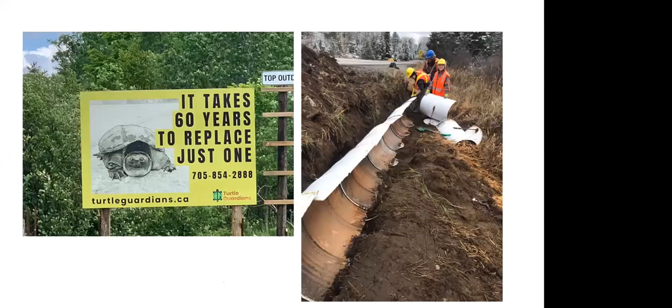Carrie will touch on those as well. And we have been piloting awareness projects too, such as these billboards.

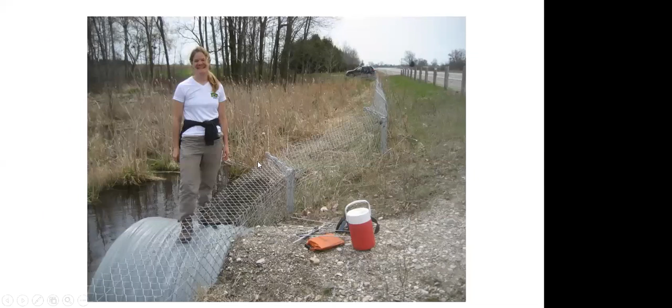So I would like to introduce Kari Gunson. Carrie started Eco-Kare International in response to the growing need to mitigate road impacts on Ontario's reptiles and larger mammals. Although originally from Ontario, she began working in the field of road ecology in Banff National Park, Alberta, from about 1999 to 2005. Banff now has 6 wildlife overpasses and 38 large animal underpasses, and these structures are being implemented on provincial roads in both British Columbia and Alberta.

Carrie started working with amphibians in Banff, then moved to upstate New York, where she became acquainted with amphibians and reptiles in Eastern North America. Carrie specializes in designing, installing, maintaining, and monitoring wildlife mitigation systems in Ontario and elsewhere. She has installed over 10 kilometers of exclusion fence for reptiles and has participated in many grassroots projects.

She is here today to share with us some of her most formative experiences in road ecology from the last 10 years of monitoring work conducted along Highway 69 from Port Severn to Sudbury. Today's presentation will focus on hands-on maintenance and adaptive management needs along Highway 69, but she's going to focus on how-tos, do's and don'ts, and best management practices for designing, implementing, and maintaining infrastructure to mitigate threats to turtles on roads.

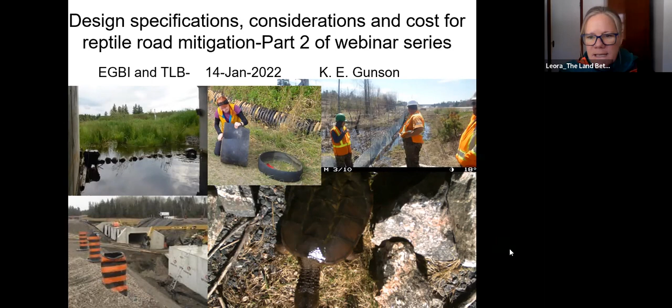So this entire project, all these series of workshops and webinars and the field day we had, is being funded by the Eastern Georgian Bay Initiative. We will start with talking about roads and reptiles for about 10 minutes. It's already 1:15, so we will be a little behind on these times throughout the presentation, and we may go over the 3 o'clock mark, so if you have to leave, you have to leave. As I said, it will be recorded, so you can come back later. There's a lot to cover. We're trying to brush through all the aspects of a road mitigation strategy for turtles and reptiles in general, but really there could be a 2-hour workshop on each one of these components.

As a background, Canada has 8 species of freshwater turtles, and all of them are at risk. If you look up the threat documents, in the COSEWIC and COSSARO documents, you will see that road mortality is listed as a threat for 7 of these 8 species. Why only 7 of the 8? The 8th one simply doesn't come out of water as much as the other 7 species do to come up and nest.

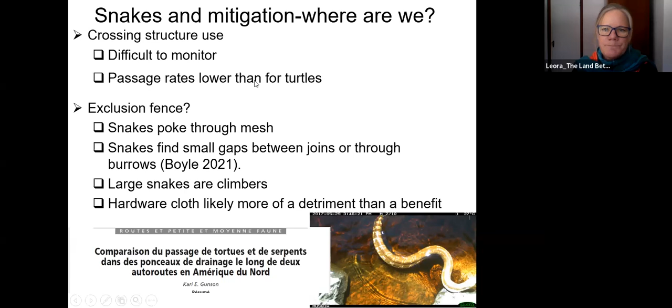Okay, so I'm going to go to my next screen here. This shows some examples with snakes. They can find those small gaps and get through. They can find the small holes and get through, and sometimes they can't get back out. And that's a problem, because then they will perish in the fence.

So some ideas of what we can do: we can securely make sure our joins have no gaps. We have to pay attention to that detail, especially for snakes. And then we can do really intense joins at elevation, with vertical profile gains within the terrain, to make sure those gaps will not occur.

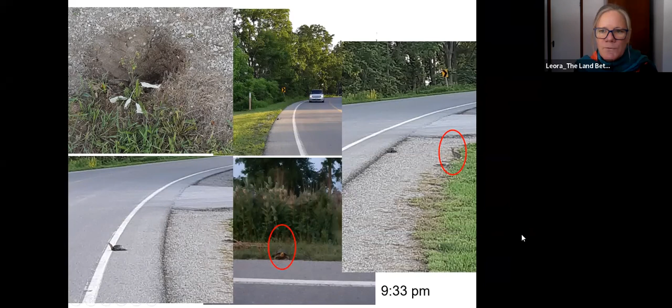So this is the biggest problem here, crossing back and forth while nesting, and they don't move fast when they're doing this. This is an example in Long Point on Front Road where we're having a lot of turtles coming up, we believe, up the steep terrain.

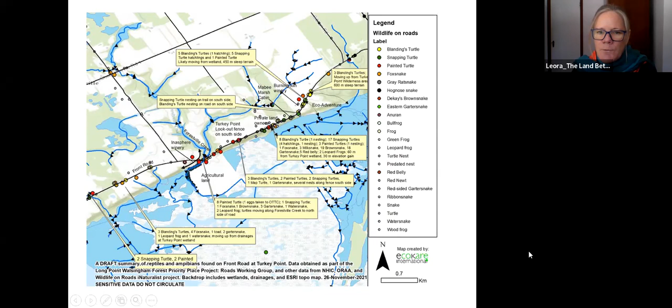Some could be coming from the inland wetlands. We believe some are climbing all the way up the steep terrain from Lake Erie marshland, and then their hatchlings have to somehow get back to where they're supposed to be. So this is a huge problem as well. This is what it looks like, and we're hoping to install some mitigation there.

What we do think will work well is having turtle guardian patrols helping these turtles cross in these areas. The traffic volumes are not significant, so we believe we would be able to do something like that.

So just in summary, I like to compare. I've worked with large animals in Banff, that's where I started, and now I'm with reptiles, primarily in Ontario. I like to compare lessons learned from large animals, because we've done so much more there for a longer period of time than we have for reptiles. I think we can take those lessons learned and apply them, and I will indicate that throughout this presentation.

So with larger animals, exclusion fence is working quite better. You see statistics of up to 80% roadkill reductions. This is because this fence is easier to build than the smaller animal fences, and I'll tell you why as we go through.

But the smaller animal fences need to have no holes in them. So this is one of the main issues here. We can have mesh holes, but there is an apron at the bottom, and I'll talk about that later. Also, the spacing between structures has to be smaller, more structures for reptiles because they move more. So this means we need an integrated strategy of designated plus drainage structures to compensate for that spacing we need.

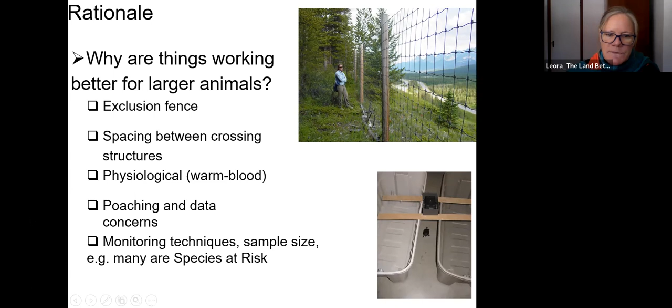And then of course, monitoring techniques for reptiles is more difficult because they're cold-blooded and we can't use motion-triggered cameras. This is us testing whether a motion camera that we use for large animals would work with reptiles, and it only picks it up on some occasions, not all. So we have to make amendments and modifications for that.

We went through monitoring actually in the last technical series, so you can look that up there if you would like. So there's two kinds of strategies, so to speak, with road ecology and road mitigation.

Strategy type 1 is using citizen science, behavior, or changing motorist behavior. It's working with humans to try and help these animals. One example is lifting them up with our hands, when it's safe to do so, to help them cross the road, and to put up signage and hope that people will pay attention to that sign and perhaps look for turtles at that location, or perhaps when driving elsewhere. These signs work better with public awareness campaigns.

And Liara has already shown you her sign. This is on Monk Road. I think this is a good idea, and we need more of these, bigger and in your face, the better.

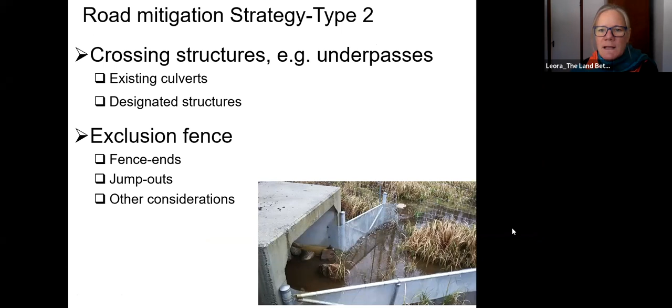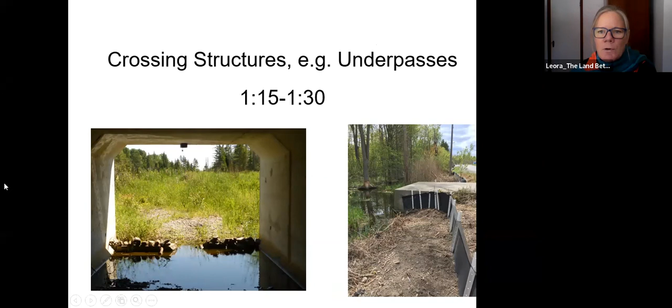So the way we set it up is we have considerations, and we're going to try to group the considerations into the same theme. So this first slide shows the first umbrella way of thinking about what you're doing when you're designing and implementing crossing structures for reptiles on roads to provide connectivity.

You want to know, is it a retrofit? If it's a retrofit, that means it's an existing structure and you're trying to make that structure work for reptiles. Or is it a road improvement maintenance project? That's important, because if it is, you can earmark those, know about them, talk to the transportation agency, and have them perhaps upsize your culvert if it's a culvert replacement project, or help integrate the cost of including specific features in the crossing structure that you need, like exclusion fencing for example. You could get the cost integrated into that process.

A new road, obviously, is a pretty good scenario, because you can implement designated structures as well as upsize your drainage structures for reptile crossing.

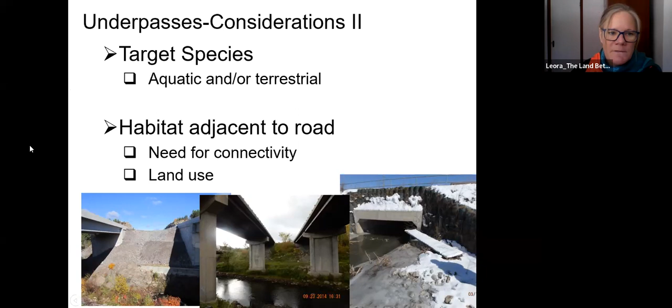And so that shows at the bottom right here, where you would want to put a ramp going in for terrestrial passage. And perhaps you would promote or facilitate smaller mammal use in that scenario, and perhaps even some turtles would go through there. Then you want to look at habitat adjacent to the road, and essentially you want to look at whether or not you need these crossing structures for these animals. In some cases, you might not want them to cross the road, and I'm going to show an example of that. This is an example of a project I worked on in about 2015 with Morrison Hershfield on Highway 17.

It was being upgraded. The road was being widened, and there was a crossing structure here for hydrology, and we were wondering whether or not we wanted turtles to use that crossing structure, because you can see that it's a pristine habitat on one side, and it's a community which goes into more agricultural landscape on the other side. So in that case, we might close that crossing structure off. And we think they were nesting along this road. So they were coming here to nest, and that's why they were being road killed. So we would put nesting mounds here and actually close the crossing structure off.

We don't necessarily want connectivity there, as long as we feel that they have their habitat on the north side of the highway. And this is an example of maybe you don't want connectivity, looking at it as site specific here, because you're putting the turtles or the animals right into a community where there's dogs and people. So we have to think about that. That's important, the land use and what's happening around the situation.

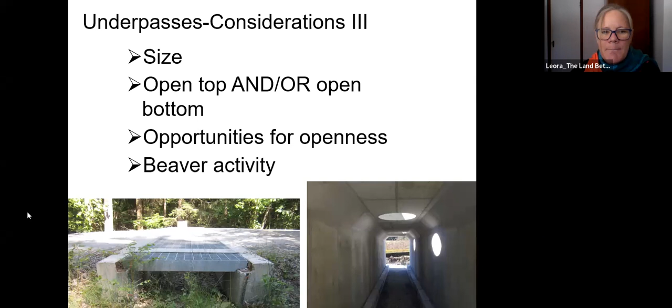The third consideration is the design of the structure, the size, whether you want open bottom, open top, opportunities for openness, always looking for opportunities. So some clever ideas that have come up are using grates for the open top, and manholes which shine the light through, and open medians is another example. So this is an example of open top ACO tunnel, and this is an example of the footing in the Bruce Peninsula of a custom-made crossing structure where they put a grate on top. It's an example of open median.

Now, if you're going to have an open median, it creates more openness, because now the structure is shorter, so there's more light coming in from both sides of the entrances and exit. And also you need to think about closing the median so that when they cross through, they won't go onto the road from there. And this is an example of Mexico where they actually have concrete closed medians. I don't think it was for wildlife, but it works well for wildlife. It's a very good example.

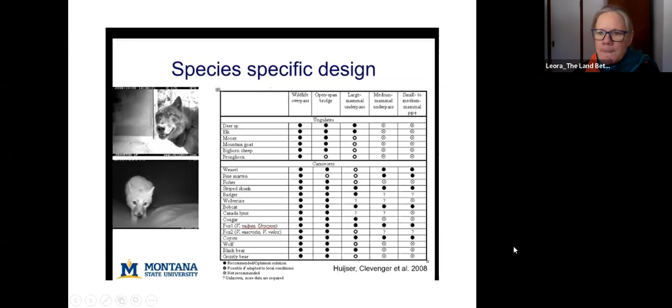So the beaver activity is becoming more and more of an issue with road ecology and turtles simply because beavers and turtles share the same habitat. So we have maintenance putting grates up on the crossing structures because they don't want beavers damming inside that structure. And in doing so, and I'm sure that fish biologists have been grappling with this problem for a long time, we have just closed off any connectivity and permeability through that structure for turtles. So we're trying to come up with some solutions that will allow the beavers to keep their ponds, turtle habitat, and keep these grates open and not have beavers dam inside.

And one way is by constructing trapezoidal fences around there, but actually creating a gap between the exclusion fence and the trapezoidal fence so that turtles following the fence come up and they can get through that gap, but beavers can't with their sticks. And beavers tend to not move upland. So you need to make room between the exclusion fencing and that trapezoidal fence to integrate that kind of concept.

This is an example in New York, where Angie Ross sent these pictures, where they've built the exclusion fencing, but now we don't have the connectivity. So we need to figure that out through these grates.

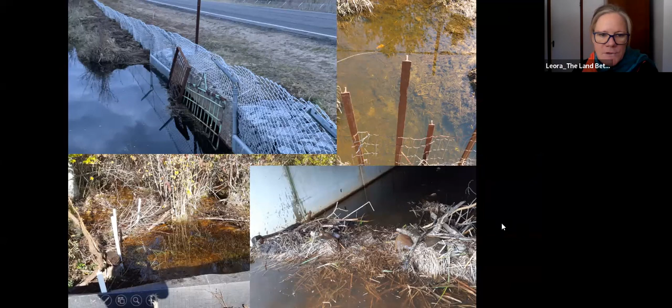So consideration number 4 is the spacing of these structures. We need to consider having as many structures as possible. The more the better, up to 100 meters for toads. And from Europe, researchers are saying 50 meters apart. For some salamanders in Europe, 50 meters apart. They don't move far. For turtles, we're looking at 100, 200 meters apart.

To do this, we need to integrate drainage structures with designated structures. I've come to so many projects where I found the drainage structures could have been integrated into the whole strategy, and they weren't. And it's not the size that's the problem. I'll show some examples, but it's just the detail that we could use those structures. Either there's too much water in them, or there's too much riprap put around them, things like that. And we need to think about that.

Now, everything can be a passage for turtles, even if it's too small. If it's not that 1 meter, we still don't know if a turtle's there, or maybe some don't want to use it, but if they have no choice, they will use it. So you've got to think like that. Alignment in the road profile is so important, and I'll tell you why, and I'll show you some examples of that.

So this is an example of not integrating drainage structures in a road that had spent a lot of money. This is Stony Swamp in Ottawa, which spent a lot of money on designated box crossing structures, which I'll show you a picture of. And then right next door, there'd be this drainage, but there's a grate on it. And the grate would have a bunch of debris in front of it. Nothing can get through. So there is opportunity for passage here. So I cleared all that debris. But people need to think about that, and we need to.

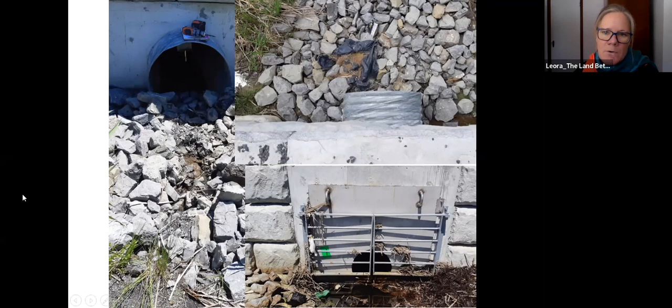This is an example of a drainage structure that we need for turtles, and it was filled with riprap at the entrance. A simple detail, an oversight, and so they came back and they put in smaller gravel between the riprap so that the turtles and other animals could more easily walk. I've seen riprap used in designated structures where they were put in wetlands, and I've seen it all over the world. So this happens everywhere, and it's a simple thing because we're used to just putting riprap at our drainage structures, and so we have to just think outside of the box.

Hydrology is so important. I've heard people within agencies say that if they're fully submerged, turtles won't use them. That's not true. We've monitored this culvert when it's almost full to the top, and we have turtles going through there. It is nice to have perhaps 50 to 75% water flow or water submergence, because then there's more light, and also they can come up for air if they need it. It doesn't mean that they won't use them if they are full, but we do want to maybe look at 50 to 75% water flow.

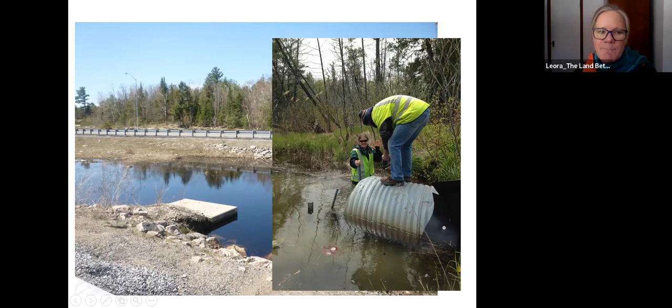And we don't want massive water flow going through either, because that could force them to go in and they can't turn around and get out, and things like that.

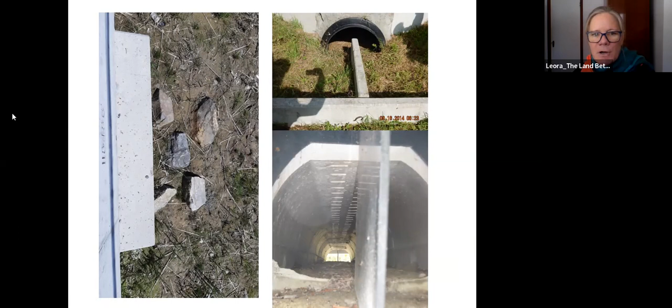So we can impede water flow simply by putting blocks in front of the structure, inside the structure, things like that. We also want to consider when an animal's moving along for hundreds of meters along a fence, looking for a way through, to maybe stop them, slow them down when they finally get there so that they will use it. And that's what these outward extensions are exactly for. And it's quite important to think about that, not necessarily to block the entrance, maybe pull it out a little bit, but I've read in so many papers where the frogs have just walked right by.

Perched culverts, you see it all the time, and not just for hydrology, but you see it for designated crossing structures. There's scouring when the water comes through. This is an example of our field day on the right. And we built a turtle ladder or snake ladder or hopefully wildlife ladder for the animals to climb up that perched culvert. And that's how simple it can be. Just grab a pile of rocks and build that ladder.

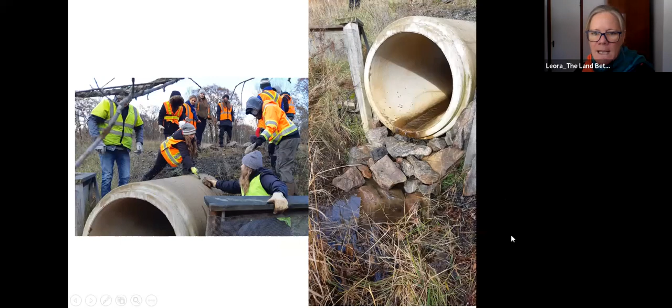Here is a perched culvert. They had put fill, hard mud, inside the culvert, so we took it out at the front here and we used it to build up a ramp so they could get in, because it was about, I don't know, 6 inches off a ledge for the animals to climb in.

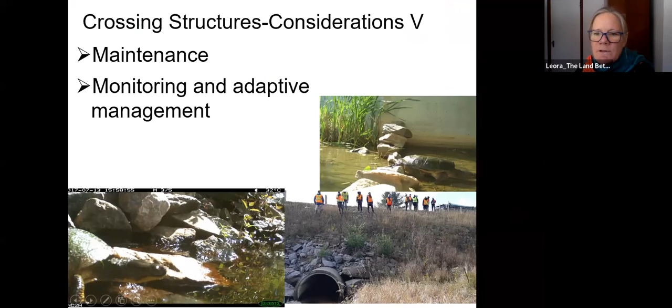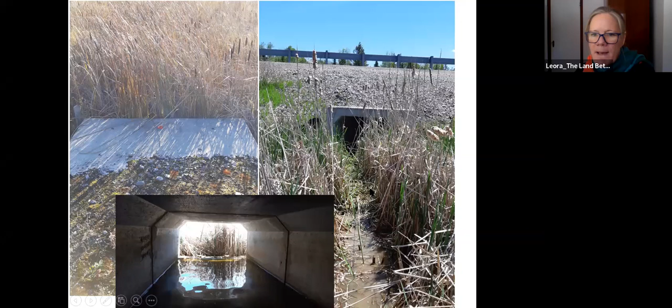Maintenance and monitoring and adaptive management, we went through that in the last workshop, but we have to definitely consider this when we're building these structures, and definitely monitoring so we can do adaptive management. These are examples from Noble Road. We have a crossing structure with a mass amount of vegetation, Highway 69. This is a crossing structure for reptiles. We cleared that with a weed whipper and we made a path for turtles. It's important to do each season.

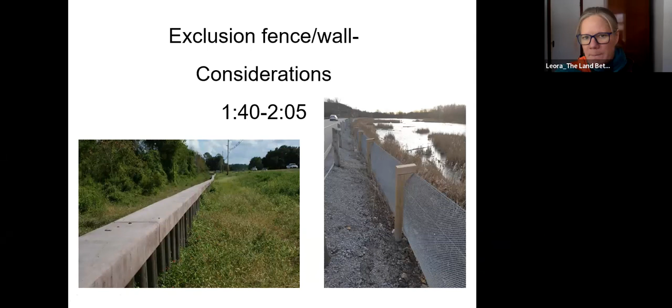Okay, so you can still see my screen, right? You can see my screen okay? Okay, we're going to go into exclusion fence and wall. Walls are important to consider, definitely. This is about barriers, about keeping turtles off the road and preventing roadkill, and funneling them to crossing structures. Hopefully going to spend 25 minutes on this section. It's a doozy, that's for sure.

So we've already gone over these types of considerations from an exclusion fence perspective. If it's a retrofit, we need to go out and select a site conducive to installing exclusion fence, and there have to be crossing structures. Or maybe we want to just put exclusion fencing on one side of the road because there is trouble on the other side that we don't want them to get at. That's possible as well. Road improvement and maintenance projects are helpful because they can integrate some of the cost into the project, but also can help structure the road widening project or culvert replacement project. You have the machines out there, so they could help prepare the landscape for installation.

New roads, obviously, give you the opportunity to work with the landscape a little bit more along the linear route, to perhaps install guide rails that you can attach the fence to, or use existing structures, or build in those existing structures. Possibly there could be a large animal fence going up, so obviously an excellent opportunity to integrate mitigation for smaller animals, and I'll talk about that.

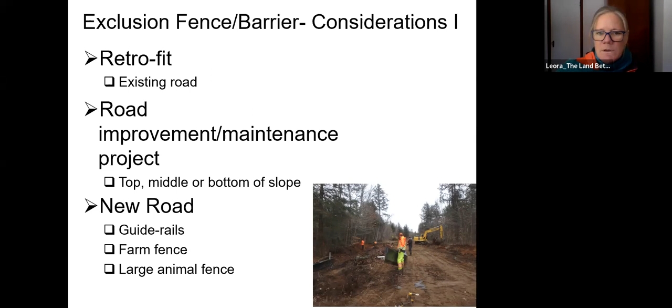So consideration number 2 is looking more at the placement of the exclusion fence, whether or not the wall can be continuous along the road transportation route. The main reason this does not happen is because we lose connectivity from access roads and driveways, so we have to take that into account. If there's a lot of driveways, you may not even want to consider exclusion fencing. However, there are some solutions for that, and I will look at them. For large animals, we use Texas gates, and there's that kind of concept as well for reptiles.

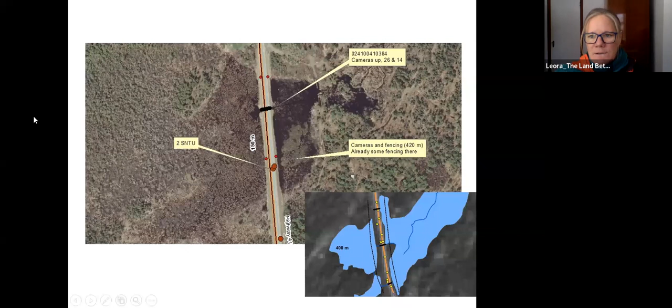This is on Highway 6 in the Bruce. If we put in a tunnel underneath there, attaching to the exclusion fencing on both sides, the fencing can go up the access road a little bit. On the right you can see it extended a little out, but I would have put that a bit more away from the road to keep the animals moving straight through. It's all continuous and open grade, so they probably feel comfortable going in there instead of going up and over onto the road. I believe this concept was installed on Highway 6 but I haven't been out there to see it. If anybody has pictures, please send them.

And quickly, for those new to turtle conservation and behavior, can you talk about how turtles navigate, how much they can climb, and why they need to cross the road? We're going to go into that a little more later. For everyone attending, those are the facts if you're not familiar with turtle biology: there are reasons turtles have to cross the road. Turtles are exceptionally good climbers, and they navigate the landscape uniquely. Carrie will touch on those. Designing these with a biologist at your side who understands these things is really important.

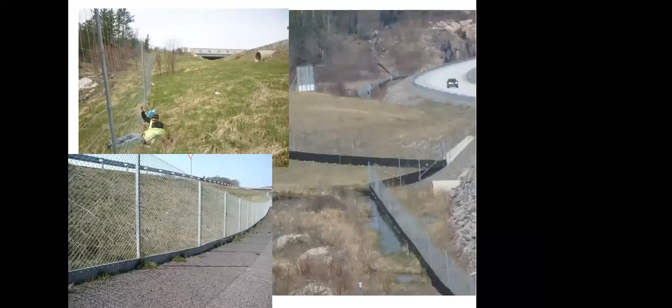This is a consideration for the exclusion fence. I talked about attaching it to a larger animal fence. This example top left had no reptile fence attached, and had they added reptile fence it could have done dual purpose, acting as the apron you often see with large animal fence. An apron is a buried piece of chain link to keep animals from going under, as you can see animals do go under. Bottom left is an example from Germany with Hans, where they have a concrete footing panel with drainage holes, which would work for reptiles if it was just a little higher. Rule of thumb is typically 60 centimeters above ground, and a top lip adds additional security since reptiles have been seen climbing exclusion fencing.

Farm fences are excellent examples to attach reptile fencing to, and maybe you have to build it, but sometimes it's already there. In Mexico, along the right of way of every highway there is this farm-type fence with concrete posts embedded in the ground, probably there for a long time. I'm trying to get them to use these existing structures for exclusion fencing instead of building a whole new one.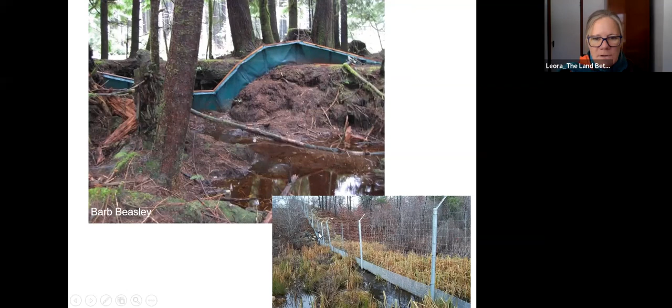Bottom right, you're looking at wetlands. Are you able to bury fencing in those wetlands? What are you going to do to get it secured there? Those are things to consider, it can get quite expensive, and that's also Canadian Shield rock. So that's terrain, consideration number three, which I already touched on. If you have steep slopes, you have to consider where you're going to place the fence along that slope.

Safety constraints are different for every jurisdiction, but they continually talk about the clear zone. The MTO especially talks about the clear zone. You can't have metal objects in the clear zone, so that counts out T-posts.

You need to know about that because then you're not going to use T-posts in your exclusion fence. So you need to know about that in the designing phase for your exclusion fence design.

Drainage constraints are obviously a big issue on roads. We've been trying to work with drainage, with more storm events on roads that have been occurring.

So there are going to be washouts, and that's always going to happen, regardless if you use mesh or solid fencing. It might happen more with one than the other, we're not exactly sure, but it happens with mesh.

This is mesh right here. A simple fix is to put riprap in the areas where you think those washouts are going to happen, where the terrain dips down and things like that, when you're implementing your fence.

Another consideration, not so much in Ontario, is that barrier walls are a consideration for exclusion. In that case, you could put pipes underneath, which might not be as expensive an option as installing sewer systems or something like that.

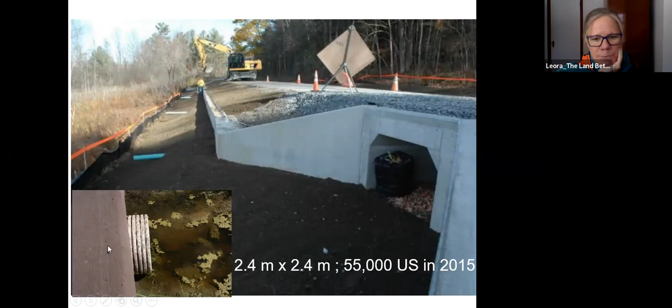This is an example of pipes going underneath, and this is a drainage pipe. You could put mesh on there so animals don't get through, and close that off for that kind of issue.

And here's an example of a solid barrier being transformed into a solid drainage, having drainage capacity with Animex.

They're hoping to get this into the mainstream market with their perforated panels, where it will be buried into the ground.

So, exclusion fence considerations number four are the target species. As Lior brought up, we might be blocking turtles' habitat needs with this exclusion fencing. That's why the crossing structures are important.

But at the same time, they could have been nesting on that side of the road where you just put the exclusion fencing. So maybe you want to position your exclusion fencing so they still have access to the nesting habitat on the roadside.

And if they don't, then you might want to supplement that with a nesting turtle beach.

We won't go into that too much, but it is important, and we need more design there and innovation, because we are having problems with poaching. Again, another complication with turtles.

If there's going to be poaching, and poachers know that the turtles are there along the roadside, they may go up and down the exclusion fence looking for these turtles.

So how do we make that work? Opportunities to put these nesting beaches a little further away from the road would make sense. And we need southwest exposure, so we need to know that there's not going to be forest and trees around that nesting mound.

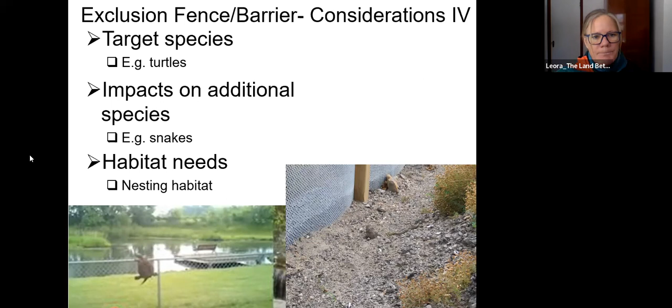And this is examples of the nesting beaches. This is where we know that the turtles are nesting. We've put exclusion fencing in, we've cut them off from their nesting habitat.

This is an example in the Bruce where they put a nesting beach. This is Presqu'île, where they built their nesting beach almost exactly like the road shoulder, and it's compact, and they've shown pretty good success.

But they have to protect those nests because they have high raccoon levels, because there's a lot of people and camping and things like that here.

So it has to be an integrated strategy, not just put the nesting in and then leave. And this is an example of a brick sand nesting mound inside the exclusion fence in Simcoe County.

Budget is obviously going to be a big one. We'll talk about cost, who's paying and how you're going to get the money. We're going to talk about a few specific examples.

Longevity, the desired lifespan - best to go permanent in the beginning. Then you don't have to do it again and go through the whole process again. Do it right, make them permanent and long lasting.

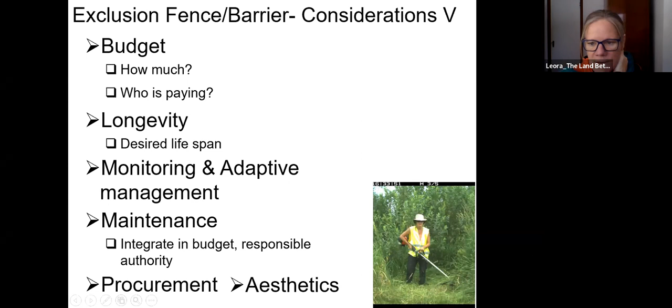Monitoring and adaptive management, we talked about that before. Maintenance - who's responsible? This is a problem all over the world, not just here. It's more important because one small hole, the turtles will find. It's amazing that they are so tenacious, maybe it's because they just really don't want to use those crossing structures. So we've got to make those crossing structures work for them, and make sure we don't provide them opportunities to evade the systems we're building, spending lots of money for.

Exclusion fence considerations, not just the fence itself. A fence end is so important. If you can't span as much habitat as you want, go 100 meters beyond and 100 meters beyond - if you have a good fence end and find those opportunities, you can save that fence end effect from happening, which is a huge problem with large animals and reptiles. Jump outs are something we've redesigned with large animals, keeping innovative with the heights and different details. I'm going to go through that with reptiles.

Fence ends - we can either do nothing, shown on the right, not recommended. If you're going to do nothing, at least make sure you span all of the habitat and then some. Tie into existing or engineered structures, find those structures. At the other end of this fence, there's actually a bridge going across, and they ended it right before - if they extended it to that bridge, it would have been better.

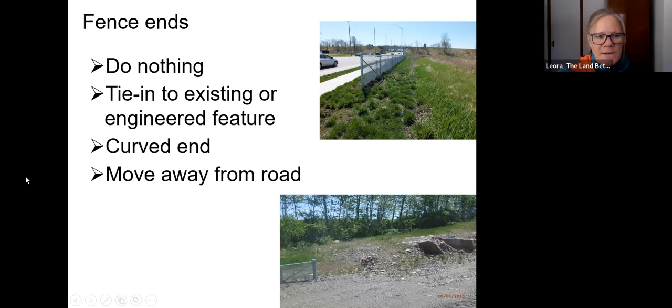Curved end, not just a little curved end - I'll show you examples. Move the fence away from the road. This is an example of a tie-in into an engineered structure, a wing wall, and it wasn't done properly.

So what you can do to fix that - a great temporary fix that might even last quite a long time - is just put some rocks in there where you've got drainage, and turtles can't get through that.

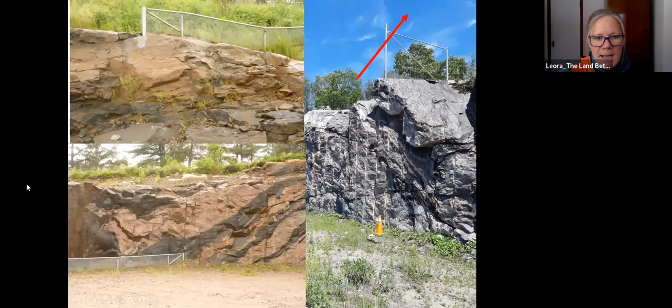So a better way is to perhaps tie it into the cliff. You've got to assess each one, not halfway up - that won't work either. We found that turtles went straight down and in anyway.

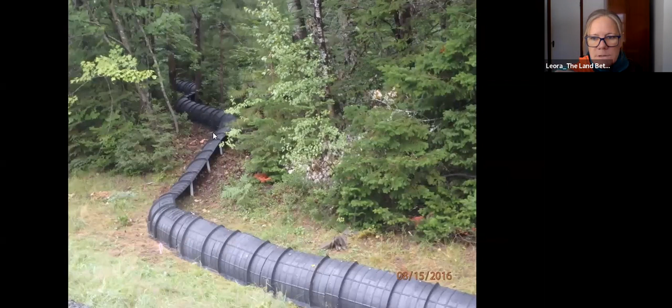To extend it away - I'll show you some other examples of what you can do with the fence end, curving it and moving it away from the road. This is one, moving it away into the forest.

This took a lot of work to go into that forest and remove the debris, and we're probably going to have a lot of trees fall on it as well, but that's what we chose to do. It's protected in there from snow at least, and it went in about 50 meters and snaked through there. So that's one of the Cadillac fence ends I've been involved with.

Here's another one on Highway 7 with Animex. We tied it into a rocky outcrop here. They could still climb and go around and jump here if they so chose, but because we curved it around in a way, we're hoping that we loop them back.

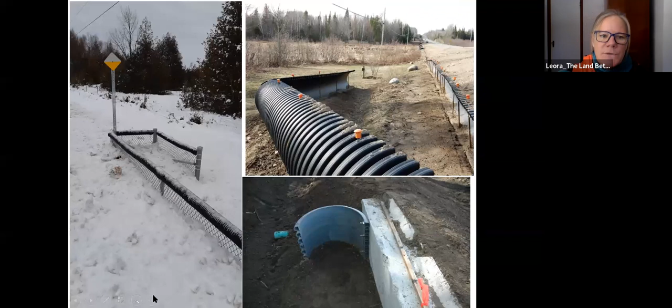This is an example of a don't. This is the MTO in their standard drawings right now - it needs to be updated. This is what happens on almost, I don't know, 80% of the MTO reptile fence projects. We have a little 1 meter loop back and maybe 2 meters coming back in.

Paul Haven's research has shown that a 6 meter out and in has diverted at least 25% of turtles back, and they didn't go back around because he had a camera to look at that. This is in Vermont - this is a small loop back, not a J hook. I saw in the chat that it's not ideal. We want this - that's what we want, and that's what the research has shown to date.

Jump outs: when are they needed? I've seen jump outs every couple hundred meters along long exclusion fence projects, and I'm like, why are there so many jump outs? We don't need that many. If you have a good, strong, solid mitigation strategy with fencing and crossing structures, you shouldn't need jump outs. Jump outs are intended for when you think an animal is going to get on a road and be trapped by the exclusion fence or wall.

So keeping that in mind, when would that happen? That would happen when you only have exclusion fence on one side, or when you have a fence end that ends here and fence on the other side. So you probably want a jump out here.

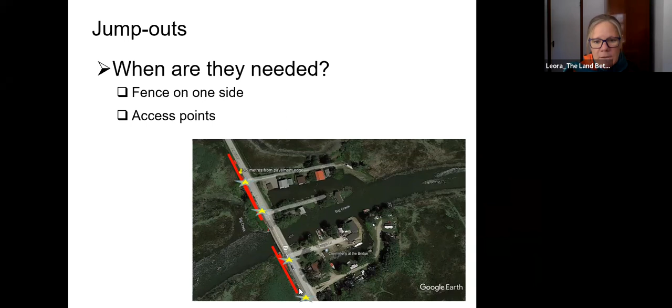This is an example of Big Creek Bridge at Long Point, and we're putting 4 jump outs here because we're having crossing here, but we can't have fencing continue along these access roads. So either we put those tunnel or Texas gate type things in, or we allow animals coming in. Hopefully most will use this brand new bridge with a terrestrial bench to cross, but if they don't, we have well built and designed jump outs here. The jump outs here are going to be so important to be designed properly, and I'm going to show you that.

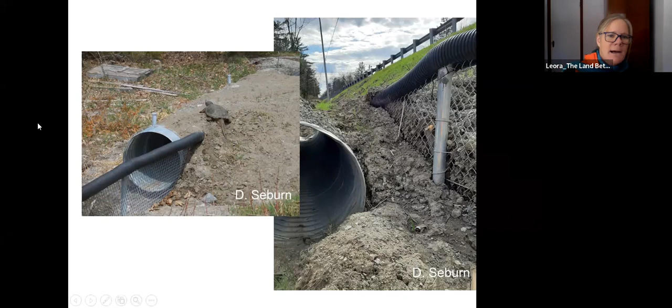Thanks to Dave Seburn, who sent these pictures of a really neat design. I'd been there myself and wasn't quite sure what was going on, but this culvert is a jump out. However, without maintenance, this jump out won't work because the dirt has come down, meaning animals on the roadside can now climb up here and circumvent the exclusion fence, which we don't want. This one is intact, and the turtle used it the right way—probably the only picture I've ever seen of a turtle using a jump out.

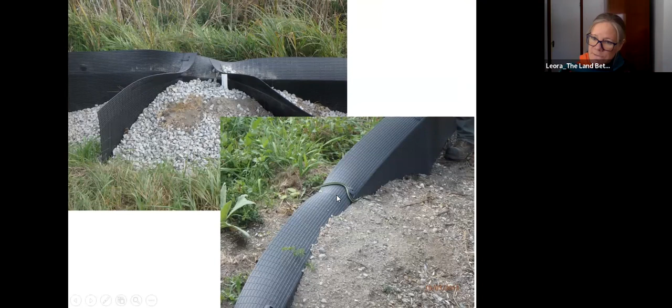So here we have a jump out—at least this one is temporary. It's probably going to erode, but there's no cutting into the exclusion fence and messing with it. And we actually have a picture of a snake using a jump out. So that's good—a garter snake.

So for reptiles, 60 centimeters is good with an overhang lip—I'll show you an example of that being installed. If it's for fox snakes, you need 1 meter, and you can have what you have for turtles. If your jump out is only 60 centimeters but the rest of your exclusion fencing is 1 meter for that target species, it's useless, because you need everything to be at the proper specifications for the target species.

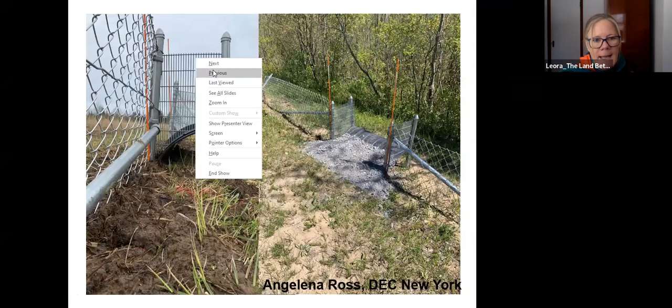And they will. And this is an example where the fence didn't extend to the crossing structure. So good spot to put a jump out so that they come out here and they will go there and then they're on the safe side. So there's a little bit of thought that went into that.

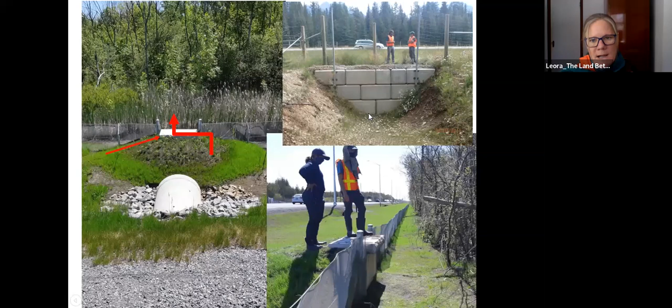This is an example from Angie Ross in DEC in New York, and this is using one of the fence panels. And I don't necessarily like this because small mammals can get up over there, but it could work for turtles. So it's an example of, but again, this height is so important so that they can't get up and over. Larger snapping turtles may be able to do that.

Okay, I think I'm going to take a small break. No, actually, I'm going to go through this if everybody seems to be okay. How are you doing, Leora? I'm good. I think we can barrel through. Yep. Okay. We've got lots of questions still on topic with the exclusion fence. Yeah, we've got lots of questions to answer, and okay. After this, there's a break. If people haven't looked at the chat, great conversation in the chat.

And yes, I totally gapped in terms of baiting turtles with food, and never a good idea because you'll also bait predators of turtles. And also, yeah, food is never a good idea, and feeding wildlife is not a great idea generally anyway. So yeah, go for it, Carrie.

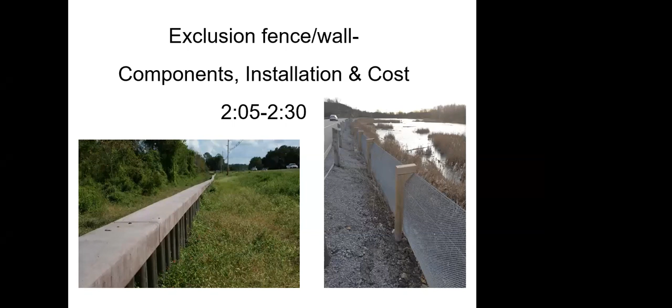Okay, I'll go for it. Exclusion fence and wall components. So we're going to go through variations between, I talked about walls and I talked about exclusion fence, and more about the pieces of them and the installation and the costs, with the mind frame of choosing what works best for your project.

Okay, so framework, because when I write these guideline documents, people want me to say, okay, just tell us what to do. Yeah, I can't for every project, for every species. And it has to be site specific. We need to involve engineers. We need to involve road ecologists. We need to involve landscape architects, landscapers, and fence contractors as well. So there's a lot going into this, and there's a lot of thought that needs to go into it as well. So framework.

For exclusion fence, we're thinking not wall, just an exclusion fence at this point. We need posts, pressure treated. We've seen pressure treated being used on the MTO projects, and they can't use the metal T-posts. You could use T-posts if you're allowed to in your other projects, if you have road allowance and things like that. Cedar posts used for large animal fence quite often. Consider outriggers or chain link or wood piece coming out. You can see this bottom picture, that top piece of wood is also acting possibly as a lip, if it works. Hopefully it deters the turtles from getting over.

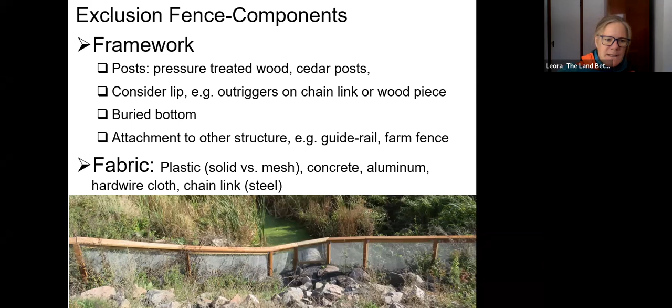There could be plastic, and there's plastics out there that's solid versus mesh. There's concrete, there's aluminum. Aluminum we haven't seen so much, but I'm going to talk about that. There is hardware cloth, which I do not recommend for reptiles at all because of entanglement. And then there's chain link, which is steel, which is often selected because it's accessible, and contractors know how to install it.

The problem with chain link, here's some chain link here, is snakes can obviously get through, and so can hatchlings. Now, Leora mentioned in the beginning that maybe we're looking just at adult turtles. So if that's your selection and your choice, then chain link would work.

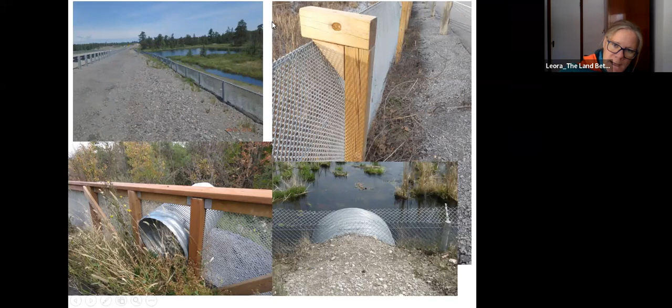It's easy to put the outriggers on top of chain link, and this is shown to work well for adult turtles on Highway 24, attached to a 1.8 meter drainage culvert. And this is the MTO design we're seeing all over Eastern Ontario. The purpose of this top piece of wood is to provide that lip to go over. I would maybe extend it a little bit more and attach a little more, because the lip at the angle, I don't think it's sufficient.

But again, do we know that turtles are climbing this? It's pretty tall. This fence is at least a meter, and it's small mesh. This is chain link mini mesh, they call it, and it's being used here. We have seen some smaller snakes go through there. That's a con. But again, if we're looking at adult turtles, how many snakes are we losing that are going in there? So it would be good to evaluate that.

This is the 1/4 inch hardware cloth made in China. It's very heavy gauge. I don't necessarily like it because if it becomes disentangled from the framework, it's now a very sharp object. We think that this doesn't rust easily, as opposed to what we saw on Noble Road. In Noble Road, they had used a 1/4 inch made in Canada fabric from Home Depot or somewhere like that, and that rusts out. We know that rusts out in water. We don't use that anymore. But this, we haven't seen it rust out yet, 8 years of being implemented. So these are the things that we're still looking at as they get implemented.

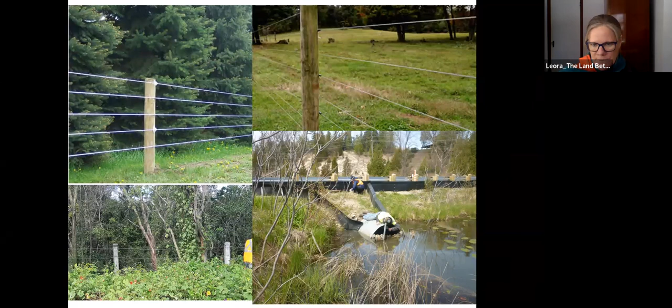And I talked about building the farm fence and attaching it, this in Mexico. This is an example of it being attached to a guide rail. That just helps tremendously; you have so much more selection of what you can put up, because your framework is there. And it also cuts down on your costs for the installation. It's simply attaching to something that's already there. The posts are the hard and expensive part. This example of chain link on Highway 401, you can see the support cross wires on there and the outrigger for the lip.

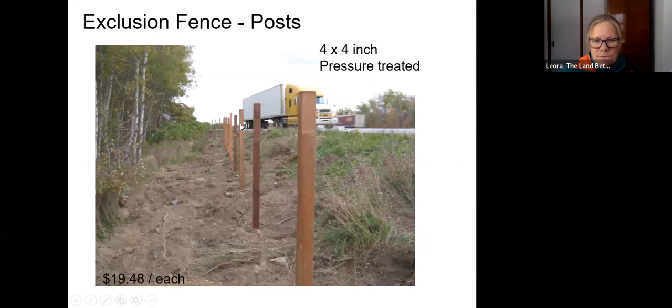Exclusion fence fabric not recommended: wood. It warps and it's very difficult to fit into the terrain. There's an example of screen cloth that was blown out on several projects in Ontario. It obviously won't last the elements. And I talked about hardware cloth, geotextile. Freestanding geotextile would be a problem. There's so many different kinds of geotextile, pool cloths and things like that. That could work in British Columbia when you don't have a lot of snow and it's tucked away in the forest there. It could last quite a while if it's built properly.

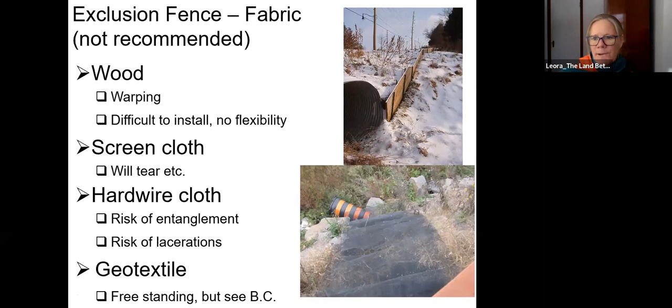So solid plastic examples are Animex, and for the freestanding, they're recommending cross wires to help with keeping it up. Obviously, you can attach it to a farm fence or build a farm fence, or you can attach it to a large animal fence. A con has been the drainage problem, so now they've come up with the perforations, and you can get it with the top lip if you would like. One of the cons: tricky to fit to changing horizontal and vertical terrain. You need to look at that.

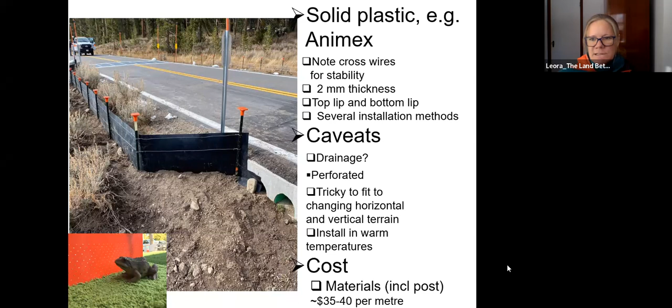Installing in warm temperatures is better because it's plastic. We know how plastic works in really, really cold temperatures. It's very difficult to maneuver. The cost, including the posts, is $35 to $40 per meter, and it's manufactured in the States, so it can get here quite quick. Here's the MTO fence I talked about. I'm not going to go too much into that. I already described it in detail. I'm just going to show you some of the costs here.

These are the ones that have been installed in Ontario that I'm going through right now. And this is an example I call the Waterton design because it was first used in Alberta with metal, corrugated steel pipe cut in half and put in the ground. And then in Ontario, we've seen it with the HDPE pipe in several locations. This is an example in Haliburton, and the specs are there, 75 centimeters high. So it's cut in half. And I just wanted to show the cost of this type of fence is about $43 per meter. And that came straight from Heaven's paper that he wrote up on it.

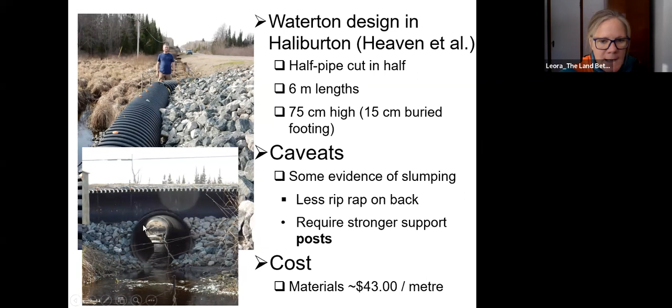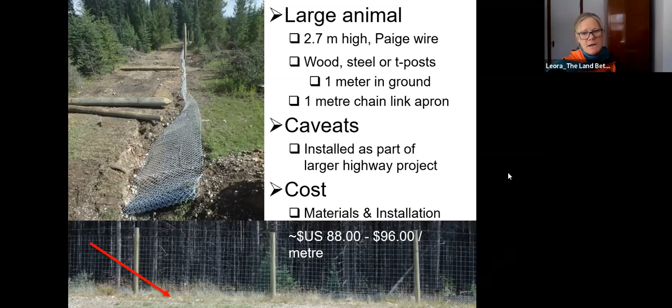And, as I said, you could change that apron to the material that you wanted for your target species. So for 100 US, 130 Canadian per meter, we could have both types of fence. Sorry, I want to make sure you know that's materials and installation, whereas before we were just looking at materials. So this gives you a ballpark idea of how much these things should cost. And we can go from there.

Now, in addition to costs of materials and installation, there are other costs to think about right now, especially with everything that's going on in the world. Design oversight, you need to add 10% per kilometer. And that's something to consider. Maybe that number varies a bit. Delivering heavy material is going to be something to think about for sure. And I'll go into that a little bit more. Installation will vary, but we're seeing high numbers for installation. I'm going to talk about that closer to the end.

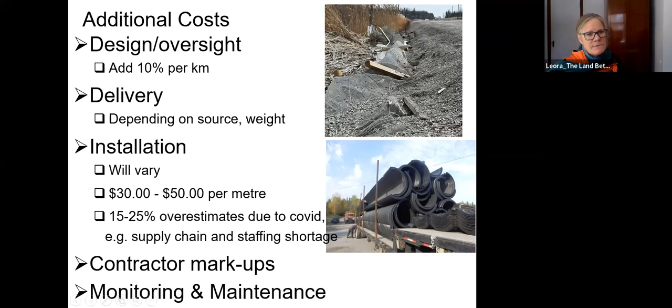And a lot of it is due to COVID, supply chain and staffing shortages right now, but there may be ways that we can keep that number to a range that is practical. And there could be contractor markups, and monitoring and maintenance, of course, needs to be integrated into the overall cost of installing this stuff, which on a lot of projects hasn't been integrated. Exclusion wall components, I'm going to go through this pretty quickly.

It's not as complicated as exclusion fence. It simply works better, and it's just more expensive, but it works better. We should definitely be thinking of going this route instead of fidgeting around with all the other exclusion fences that sometimes have their pros and cons. Whereas these just have pros, except for the fact that they cost more.

So we have sheet piling, concrete blocks, armor stone, prefabricated concrete panels. The thing with these is the maintenance costs are so much lower that, if it's installed properly, you're really just looking at clearing vegetation.

So this example from Vermont, we've written this up in a couple case studies, available on the web if anybody wants to know more about this project, where they used concrete waste blocks. The expense for the material was negligible, but the cost was in delivery. The contractor that installed the crossing structures also installed the fence, so it was kind of all included. It ended up costing, for the price I got, $96 per meter, but that includes installation and delivery. That's US.

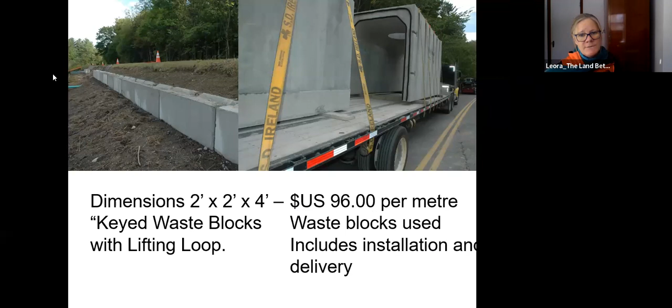And this is, did I show a picture of what it looks like? No, not there, but from kind of an aerial perspective. So we've seen this in Ontario, right here in Whitby, Victoria Avenue. We have a very expensive wall along a wetland. Maybe this one's overkill for turtles, but this could have been for pedestrians as well. For turtles, we obviously just need this kind of height, 2 feet.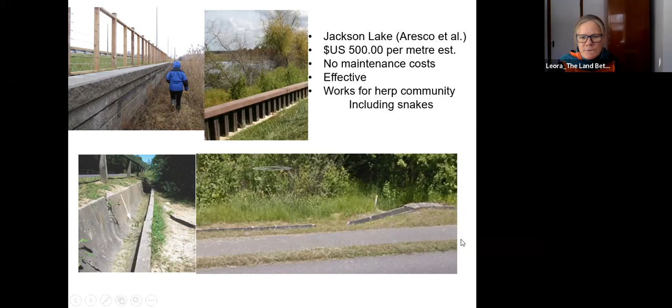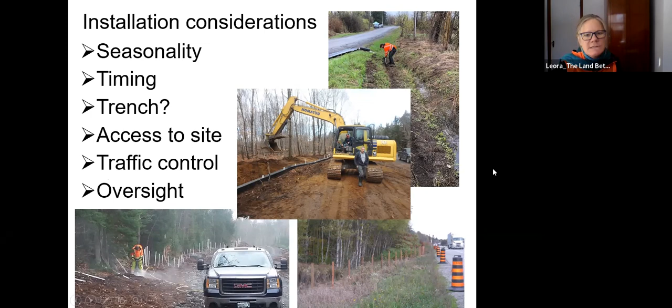Installation considerations: the season that you're going to install all of this is very important. You can't get posts into frozen ground. Give yourself time and understand that it's going to take maybe 2 or 3 years, especially now with COVID. A trench is so important—how are you going to get that trench? Some places are much more difficult than others. Access to the site, traffic control, and oversight is huge, so huge that we make sure what's put on the drawings and the design is integrated into what's actually on the ground. We need our transportation agencies, engineers, and environmental planners to get in there and ensure that happens.

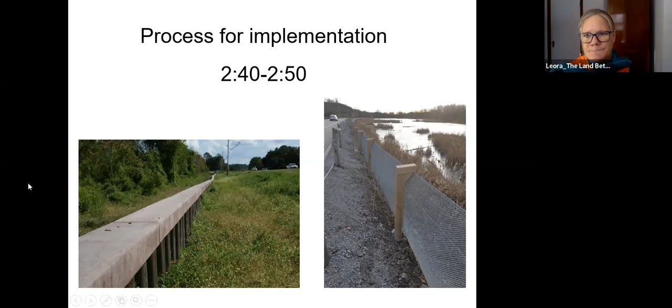All right, so the process is a whole other workshop as well. In Ontario, and everywhere else, we are seeing either grassroots led, which I love—and that's where I've actually learned how to install most of the exclusion fencing, through grassroots and through trials with companies that have approached me wanting to trial, such as Lior piloting her metal fencing, you know what I'm talking about. I got a slide coming up on that. Anyway, the grassroots approach is phenomenal.

I find that grassroots is really good for 500 meters and less, like the smaller projects. So if you're not doing massive projects, you can get a group of rangers together—students looking for a summer job or being paid through Canada Youth Employment—and get a bunch of them together to help you with shovels. You don't need machinery, so I love those kinds of projects. They work well, the people care, so it gets done properly.

We get funding from some of the habitat stewardship projects and funds, and we can also train people to install this at the same time. Hire contractors or some team of able bodies—that's kind of what I'm talking about. But also, if the grassroots people learn how to do this, they can also maintain the exclusion fencing afterwards, which, until we figure that out, needs to be maintained. So they have almost a share in the project, and so it's looked after.

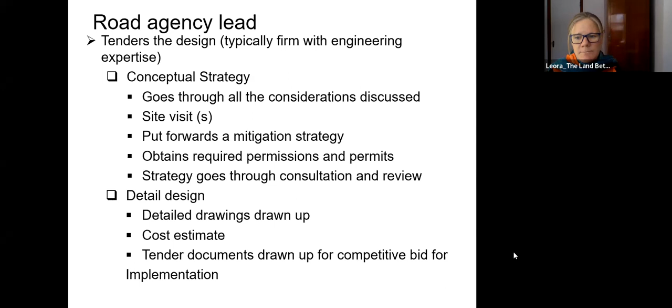It'd be interesting to see how that held up. It was actually built in Kouchibouguac. I haven't been back for a couple of years, but they did have some snow damage on their fence, which is a big problem - I had no idea how much snow they had in New Brunswick, but they have a heck of a lot. But they had an integrated strategy of culverts, hydrology, and designated tunnels going together, and we integrated them all into the fencing design.

Okay, so I put together this big long list of how we can do better. I guess it's kind of a summary, and I'm going to go through some of these examples with illustrations. And I talked about the tendering process.

Supervising oversight with the contractors, quality control measures into the tender document. What I mean there is ensure that if something goes wrong with the installation, if it's not done properly, that there's a 2-year period where they have to come back and fix it, kind of thing, because we haven't seen that up until this year - we're starting to see it now.

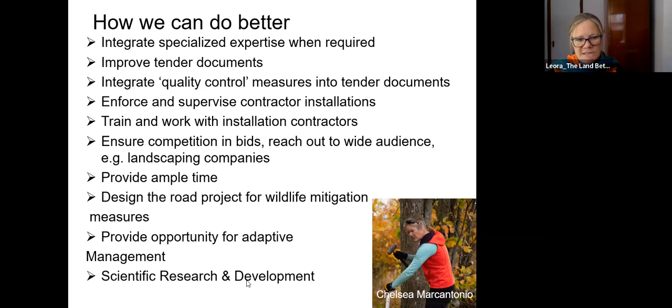So scientific research and development, we've already heard about. And there has to be opportunity for adaptive management. This is a problem with everything we do with the environment - adaptive management is supposed to be done, but it never is. And there's never money, so we can't go in there and fix what was wrong after we've monitored it. It just gets shelved. We need to have those opportunities, and it's not going to work if we're trying to do HSP grants and go around and fix all of it. So we need to stop that right there and put it in right for starters. And if we don't, then we need to be able to get in there and fix it. Again, if we have more trained people, the easier it is to do that.

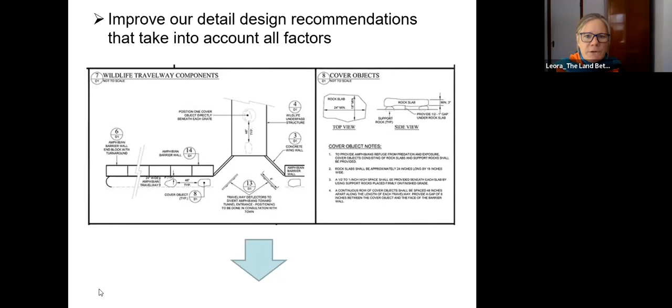So this really is important, these drawings. You can see these are 2 drawings I pulled from many projects that I've reviewed for guideline documents, and these are actually available on the internet - I'll send the website for people that want to look at the drawings.

There's a lot of detail in what needs to be done, so you want to make sure that those are followed. This is an example from the Vermont project, the Monkton Wildlife Crossing project, and I think they hired an engineering company to help them get these drawings out.

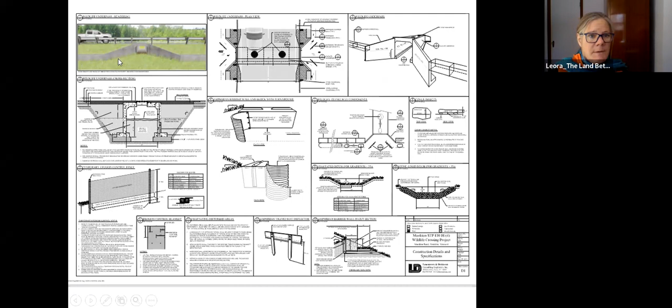You can actually see on the ground what's portrayed in the drawings, because it was just followed and done so well. So that's a before, and it actually looks like that after. So that's a good thing.

They can be quite complicated. This is an example of a drawing from the Aresco project at Jackson Lake, and you can see there is quite a bit of information and specifications for that wall they built, and other things that needed to go with the wall, such as drainage.

So we need to update our standard drawings and guidelines. The MTO is an awesome standard, but the fence end is not good, and that needs to be updated, and we need somebody internally to get on that. It's been several years now. These fence ends need to be more flexible, and something that fits with the current research.

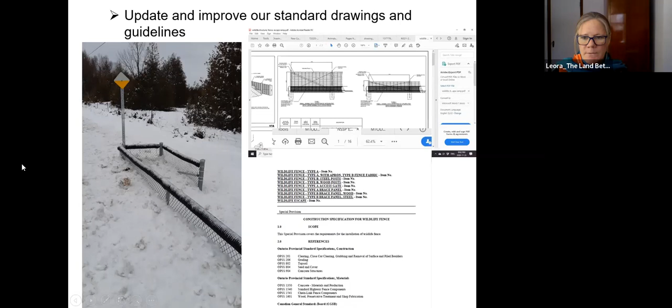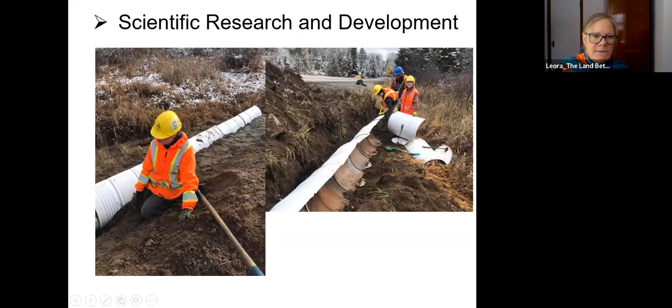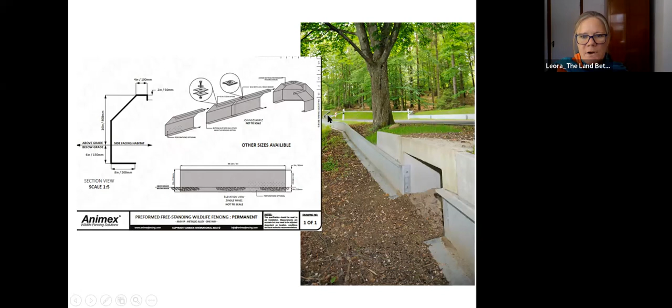I have an idea I want to work on with a whole bunch of partners - it's not my idea, they did this in Australia. It's a floating nesting beach for turtles, in a warmer climate. I don't know if it would work here with our colder water - Paul Johansson brought that up. Wouldn't it be neat if we could have a floating nest, where poachers and raccoons might have a harder time getting to it? But there's also logistics, because you have to manage the weight and load to get the materials in after building the sandbox, so to speak.

These are the kinds of things to consider - we get funding but have to install these structures so quickly that we just pour sand on the ground without really thinking about how to do it better collaboratively. We have to work as a collaboration. So stay tuned.

A lot of the guidelines I went through today are going to be featured in an upcoming guidelines document at the federal level, with Paul Johansson and Ewan Eberhardt leading this. There will be a chapter on turtle nest protection and mitigation, because that's being used more and more by nonprofits all over Ontario, so we need to write that up. There's also a bunch of stuff on exclusion fencing and crossing structures that we've already talked about.

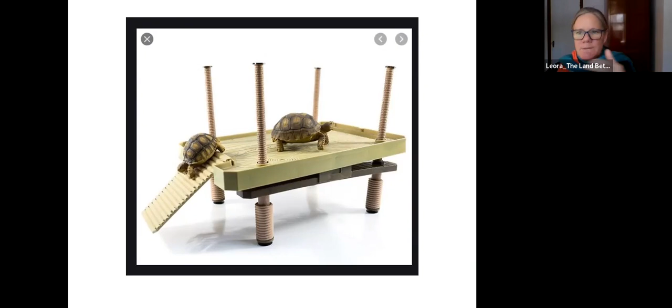If you have exclusion fence, you keep it 1 meter away from the exclusion fence upland, where the trapezoidal fence around the culvert ends. So you have that gap. If you have that gap, that's where the turtles can get in and access the culvert. That's the main way. Or the diversionary dam, if it's kept just at water level, turtles should be able to get just over top of the diversionary dam. Yeah. Those diversionary dams are wonderful.

They do work nicely. The next question was how you get involved in citizen science. So anyone involved in turtles usually has a citizen science arm or a community science arm. So the Turtle Guardians, we have about 7 different ways to volunteer and monitor turtles. We've got wetland watchers, road researchers, nest sitters, turtle crossing guards, and tunnel assessors. Kerry has Wildlife on Roads operating in Norfolk, and we're going to be partnering with Kerry to bring Turtle Guardian stuff to Southern Ontario in the Carolinian zone.

I know Scales Nature Park has volunteers as well. Magnetowan, Georgian Bay Biosphere, all of us have different community science programs. So in your area, you can just Google, or you can just email us at Turtle Guardians, and we can set you up. If we're not covering that area, we can link you to who covers that area for community science. So that's a great question.